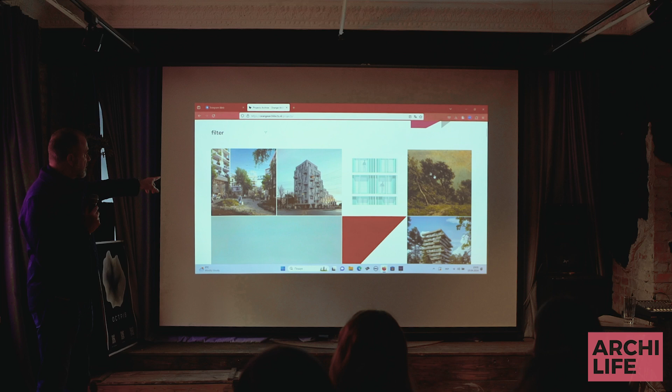I can show you, maybe this isn't exactly the project I mean, but this is a big project we just won in Zwolle in the Netherlands. It's an innovation district.

We also have a problem at the moment in Europe and the Netherlands: our building costs are going sky high. I learned today the average building cost in Kiev, Ukraine is about 700-800 euros a square meter, while in the Netherlands it's around 2,200 euros a square meter. So a lot of projects are not realizable.

So here we have the railway station of Zwolle. Zwolle is not a very big city in the Netherlands, but they want to be the fourth city in the Netherlands with an innovation hub. They want to be front runner in science, front runner in art, front runner in innovations, for the whole northern part of the country. It's a way too big ambition.

But together with MVRDV, a famous Dutch architectural company, we participated in the competition and we won it.

This image is about how, when you talk about innovation, you also talk about having weird ideas. You have 100 weird ideas and you need only one or half a good idea from these to continue further with the innovation. But you have to have this climate, a very nice climate you want to have.

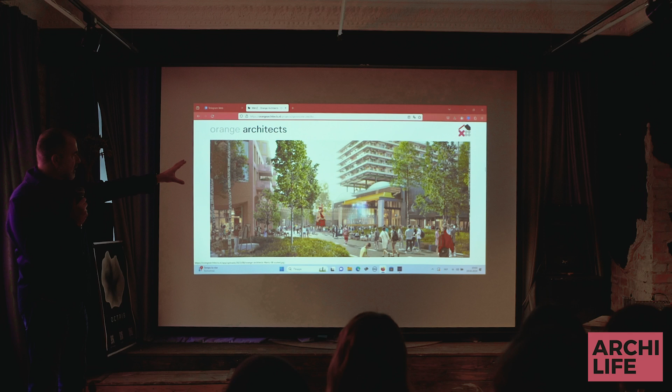This is a building from MVRDV on the existing hall. We focus more or less on the living area.

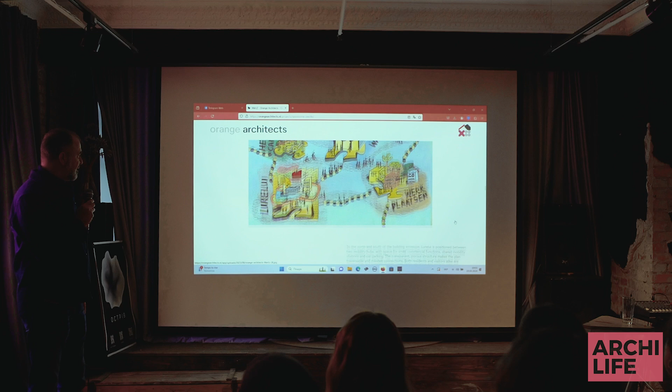This is the hall - way too many images. So what we did, we didn't focus on very spectacular architecture. We inverted it. The project, which I'll show you later, is more or less a standard building with a very warm heart on the inside.

Here we transformed it so you have small housing, but we focus on the collective functions - a collective living room, restaurant, and workplace for the people that live there, because they are also our entrepreneurs. It's a very flexible system, and with the landscape together with the building footprints, you feel you have an outside living room, focusing on collective living in this small, condensed neighborhood. We also have collective roofs.

You have circular routes through the buildings that everyone can access, so you have a 3D collective landscape through the project, focusing on livability in this area.

And the houses themselves are all made of wood. We now have a full focus on wooden buildings in the Netherlands because of the worldwide CO2 discussion and to meet the Paris demands. So in this competition too, the Paris demands for CO2 reduction are super relevant.

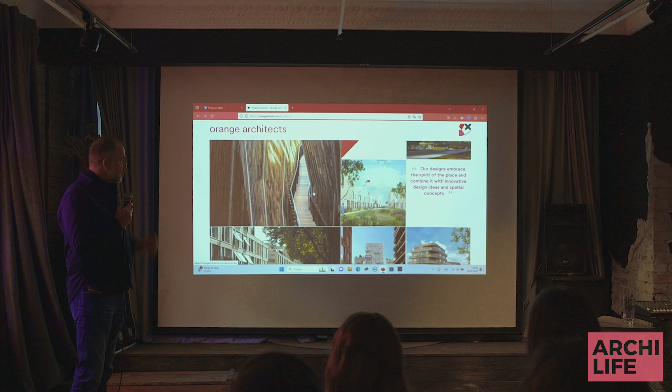If you can go back to the project page and scroll down to this one - this is a project we did in 2017, when we entered a competition. It was only realized last year.

It was a tender from the municipality. They asked for a sustainable building and a sustainable icon, so a lot of famous Dutch architects participated in the competition. We were the lucky ones and won this one too.

What we always do first with all projects is an analysis of the location, so we really understand the site, because we want to make specific architecture, not generic architecture. We also look at the client's assignment - is it really what he wants, or is there a question behind the question? So the analysis is very important.

Then we come up with a concept or a simple idea - not a one-layered concept, but one with a lot of storytelling in just one simple drawing. Because it's in the river IJ, the IJsselmeer, it has an 'I' and a 'J' on the side.

It has a collective heart, because it was made on an island, a green island where the kids always play. The people from the neighborhood, through our participation process, wanted the playground back in the project, so it's this open space on the water side - it's very local architecture. We want all our projects designed for the spot itself, for the location and the context.

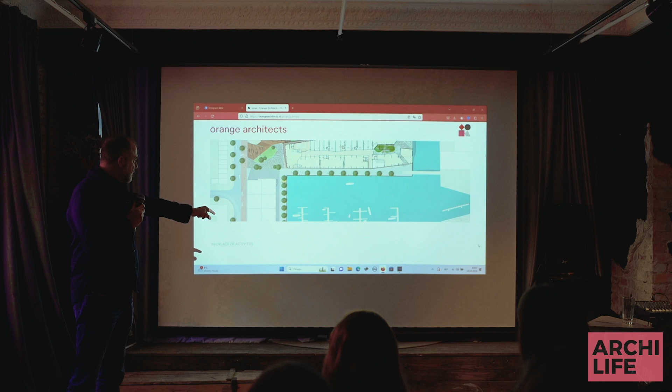This one. So when I tell you that we're not starting with architecture, but we start with a program, a lot of projects we start with this. It's kind of a functional scheme. You can also explain it like this, but it's already with some storytelling with it, because we say we start with an outside area, a playground.

The living room is the heart of the building, because we wanted to have a collective building, because the rooms or the apartments were only 50 square meters, more or less 48, 49.

Very small. But we also want to have a forest in it - we call it forest, it's a very small courtyard, but we call it a forest because of the dream. We have a rooftop with dune landscape on top of it, and then also a mountain path. So we charge also the architecture with storytelling in order for people to understand what the idea is behind it.

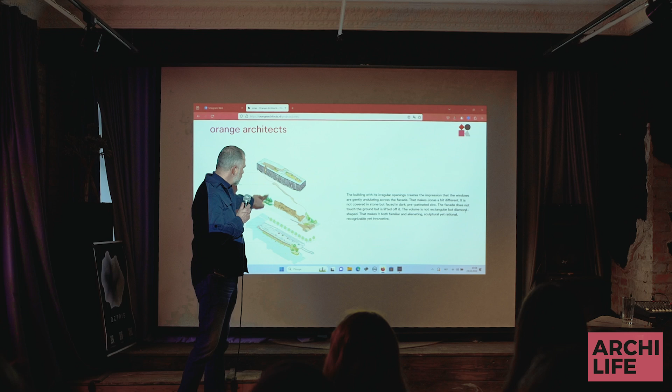And if you go through the project, or maybe it's good to go up because I have this exploded view. This one. It's a little bit not easy to understand on the right in the first place, because here's the landscape. So this is the canyon, so it's a gallery space, and here's the patio with trees also planted inside, and then we have the roofscape.

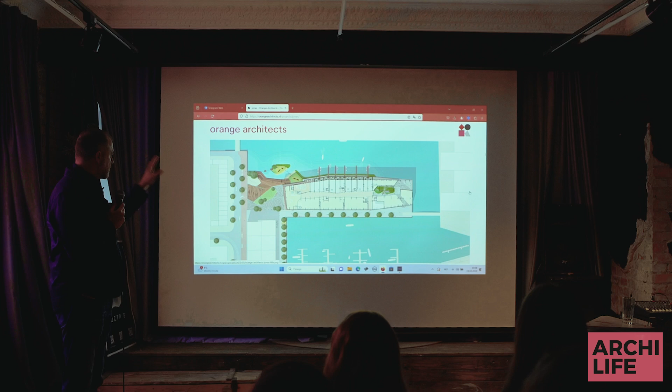If you can scroll down to this one, this is a plinth. It's also during the day completely public accessible. If you go down, so it's the facade. If you go down.

Oh yeah, this is the main living room. So here's during the day, this is the main entrance where people arrive. We have a stair going up to the gallery space behind it, so we call it the canyon.

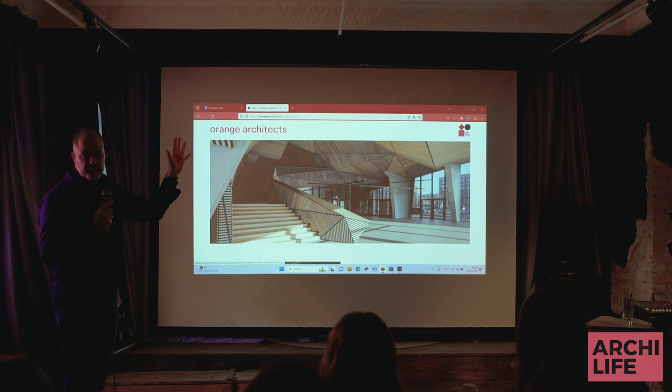If you go on the stairs, go to the left, there's a cinema. And in front of here, so where the line's coming from, you have this outside space where kids can play. You have also the entrance of the parking, it's underground, so you can sit in it. In summertime you can watch a movie, we have an outside movie screen also in the summertime. If you scroll, there's some furniture also in it.

And if you go to the canyon, it's scrolling down. So this is the inner space of the gallery. We deliberately didn't make it very straight, we moved it around, and we made wood lamellas from the top to the bottom. And you see the daylight.

Here is the glass roof, where also the landscape is, and during the spring and summer we have streaming water over the top of it. So sometimes when you enter the gallery, the canyon, you see also kids playing, so they walk on the glass, and it's very spectacular.

And the mountain path we made to connect the groundscape, the floor of the living room, with the roof. So within one movement, you can go up completely to the roof.

And then you have kind of - so we don't talk with Jonas about the building, but as a living landscape. It's a little bit weird translation because in Holland it's called woonlandschap, so it's a better word for it. Translation doesn't always work, but it feels more like a landscape where you live in. And because at the moment, if you have an apartment building, you have an entrance, you have your elevator, your gallery, and your house - that is your mental space of architecture, of how you live in an apartment building.

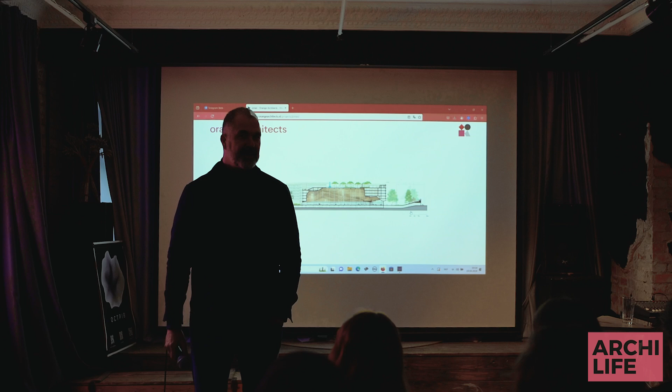We have this from Wikipedia. My thoughts about this sentence: sustainability is manifested not only in the strength of structure, but that's an important component of the concept. The moral part, the idea, and the symbolism make the architectural object sustainable. This stability manifests itself in a historical imprint, which each succeeding generation perceives through the prism of historical context.

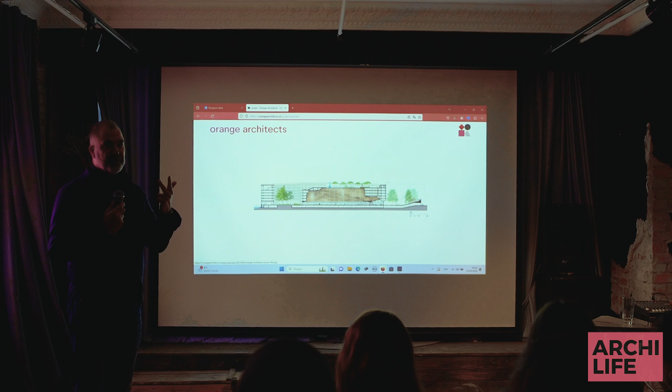But yeah, it's CO2, carbon dioxide—decarbonization is what it's called. Mobility, your petrol, carbon dioxide. Concrete, carbon dioxide. Everything you do with machines on petrol, carbon dioxide. The whole building process, carbon dioxide. Almost all projects produce carbon dioxide. And then what happens is warming of the world, so we have 24 degrees at the beginning of April.

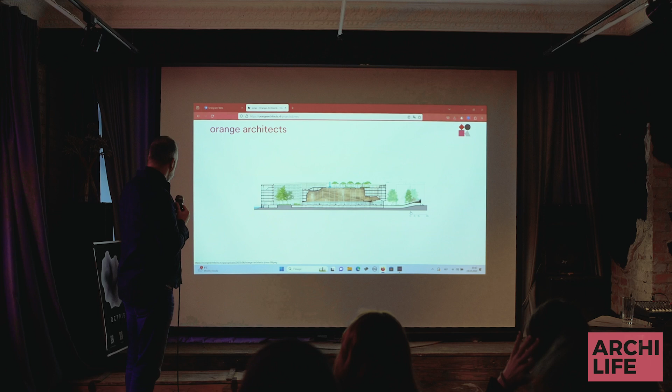There's a page, can you go to Orange Architects? Click on it, then go to concept one, then scroll down and show it. If you don't go together, I think it's fine—scroll down if you have a screen.

Sustainability is too big a container word. It wasn't really a test, but if you ask this in Dutch universities, a lot of students know exactly what to do, because they're better educated on sustainability. The European Union demanded it, clients demanded it, so the whole education system is now fully aware of it. I think it's less so in Ukraine, but it's very important for the rebuild of Ukraine and for the transition of buildings from Khrushchev time that need to be rebuilt, renovated, insulated, etc.

I'll explain what we did over the last two years in our office to get as comprehensible an idea as possible on the too-big container word of sustainability. We split it into three main themes. One is about resources—resources means materials, and that's an important one. So, use less energy-consuming products, or products that hold CO2, like wood. We did that before, but in the last 50 years, not anymore.

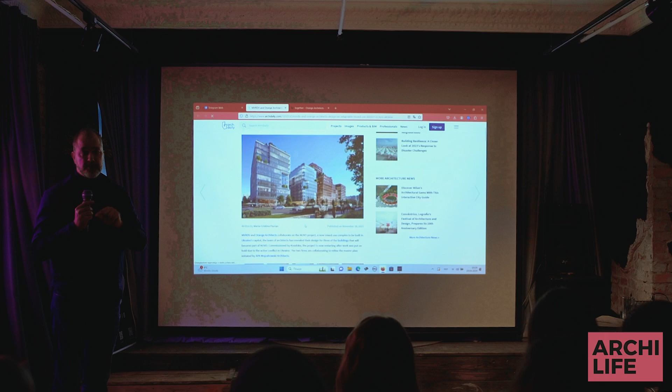So from this point of view, we are always looking at how, not to just make walls and floors, but to see how the whole ecosystem is working, how people are working and living inside the buildings. And then the building is a result of it. So architecture is nothing more than a tool, instead of a goal. That is how we look at it.

It's not the main goal. The main goal is to have you sitting in this kind of space, that there's a bar where you can meet, that there's nice light coming in. It's the processes inside, yeah.

I have a question about classic architecture. As a person who lives in a city with probably half or more percentage of original buildings, how could we make old buildings sustainable without interrupting the structure a lot? Because they have thick walls, high ceilings, and big room volumes, and you need to cool it, or vice versa. So what is the answer?

I'm not a transformation expert, but there are different techniques. You can isolate it from the inside, that's a possibility. You can also use box-in-box principles, especially for very big buildings that consume a lot of space. So those are the main two principles you can use for isolation. If you have thick walls, you have to put insulation on the outside, on the inside, or somewhere more inward with the box-in-box principle.

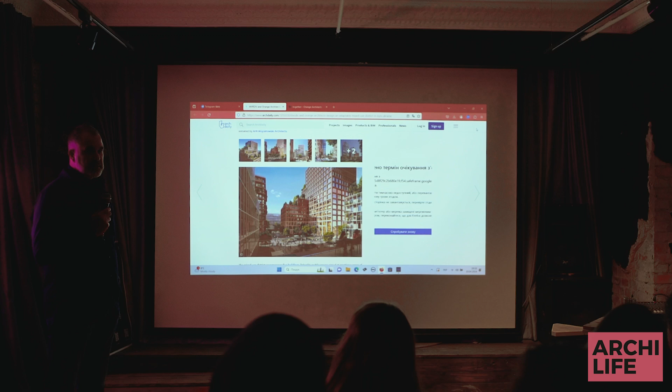Just terrible for ecosystems - throwing money away and giant CO2 emissions. It's not a good example. Okay, I think that's all.